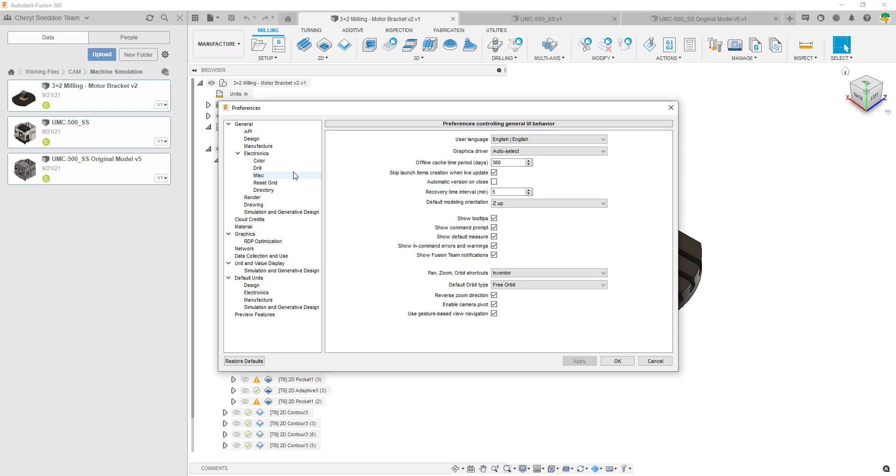If you've been using Fusion in the past, this might be familiar. Up at the top right corner of the application, under preferences, there's an area dedicated to previews. In preview features, at the bottom left, we can use our drop down list to navigate the filter, and if we choose manufacture, we go down the list and look for machine simulation and machine builder. These two tick boxes give you access to an environment where you can build your machine, with your material, your fixtures, your already CAM setups.

These machines you'll be applying are based around milling, and if we put this on as a preview, you'll have access to build your milling machines within Fusion and add some kinematic movements using the machine configuration as well. So we're going to take a look at that today.

Just a heads up, it might be a good idea to also tick the box next to automatically get latest posts and machines. The reason is Autodesk are constantly updating this environment, so we want you to make sure you're working with the latest. The latest and greatest will be automatically downloaded if you tick that box.

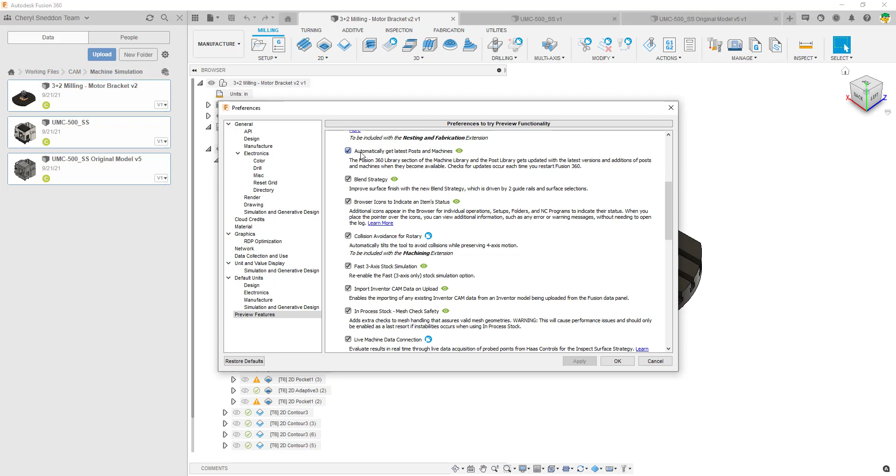Let's take a look at this 3+2 milling example that I have gathered from Autodesk. This is already set up. On the left hand side you can see we've already got some operations, and if we want to bring a machine into this environment, we need to do that through the setup, the original setup.

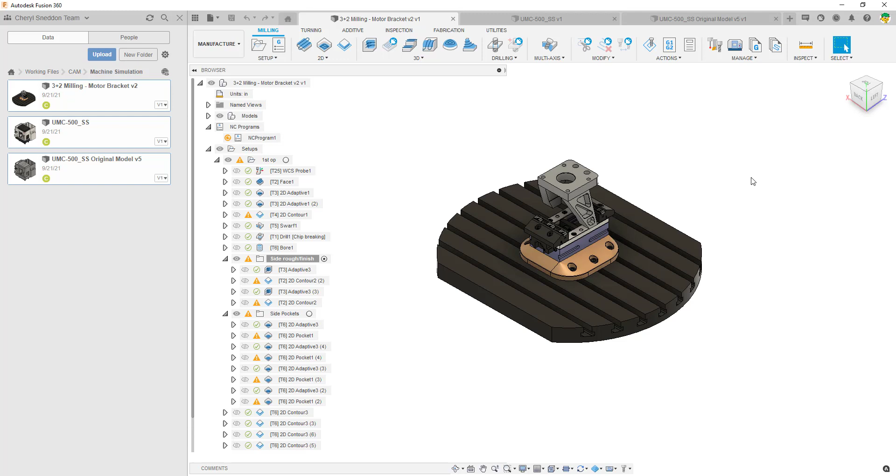When we edit the setup, you can see this has been around in the application for a while, but now we're extending the capability because Autodesk have added more capability with the machine builder, as well as enhanced machine configurations.

So in order for us to see our machine within the environment that we're so used to, with our fixtures and our part and our setup of the WCS and things like that in the beginning, we now have this familiar kind of setup for the machine as well.

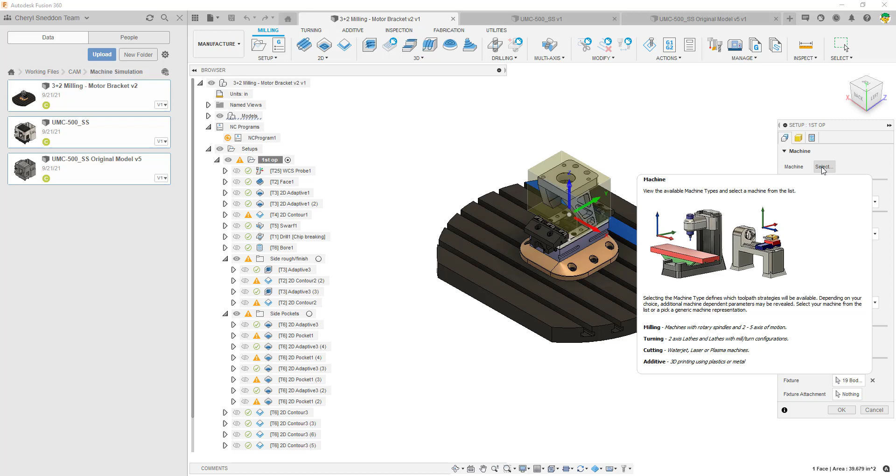If we select a machine, then that machine will basically be part of our simulation within our workflow. This is an added benefit to the fact that we're using a rapid prototyping environment. We want to keep using our prototyping environment to make sure we're not getting certain clashes with the machine, to make sure we're not going out of any limits. Everything looks and feels like it would in reality.

In the first instance, you may not have anything within your document. As you can see here, the document's empty. We don't have any cloud local machines, but we do have this vast library that Autodesk give us access to.

On the right hand side, we can see we've got some filters. Those filters are based around capabilities, and those capabilities are based around your machining techniques. Autodesk have also introduced this as simulation ready, to give you that only list filter, that just gives you the machines ready for simulation.

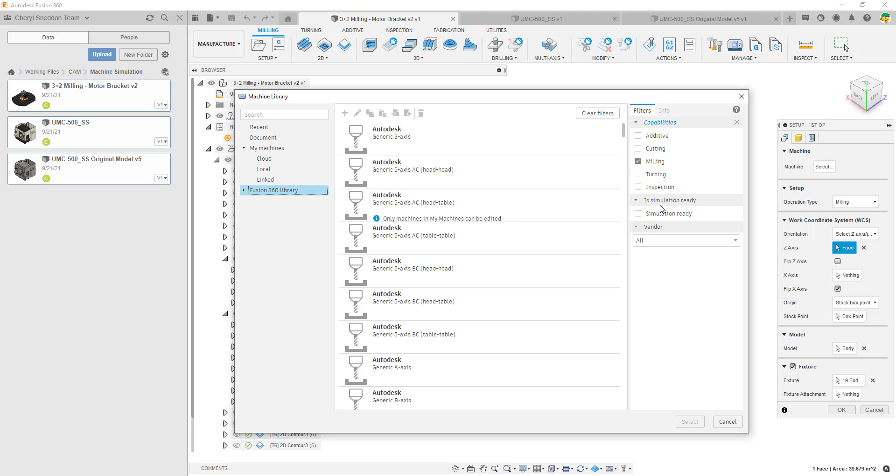The good thing is Autodesk have been focusing on this for such a long time now that we already have machines in there built around very specific vendors, and this is increasing constantly. We're getting more relationships with more vendors, and we're seeing more machines within this list.

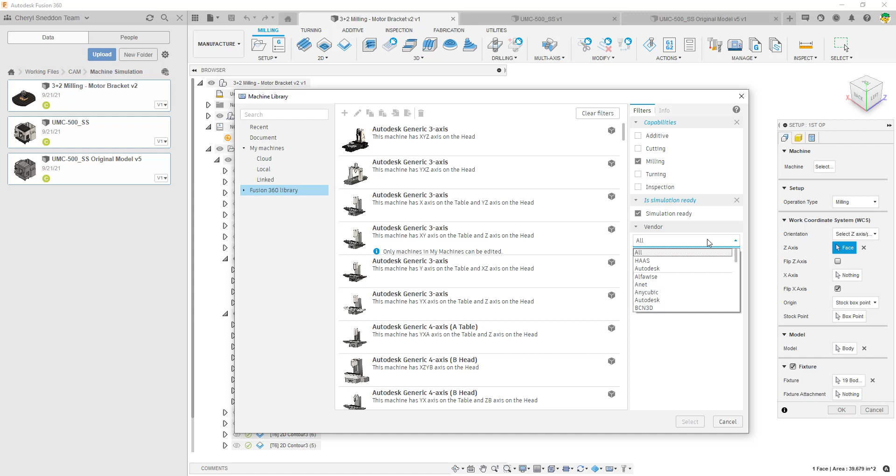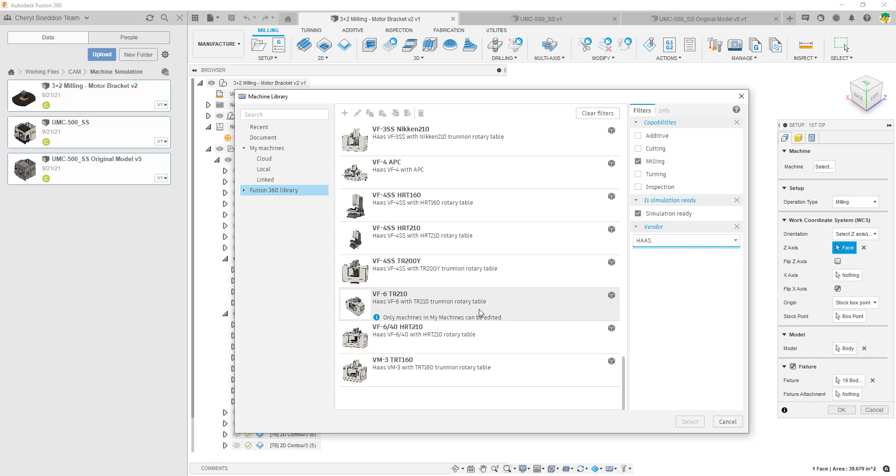So if we go for milling, for instance, simulation ready, and we pick HAAS, we can see the box in the top right corner indicates there's a model attached to that machine. The image gives us a very clear indication that there's already a model ready in simulation, available for us to bring it into our setup.

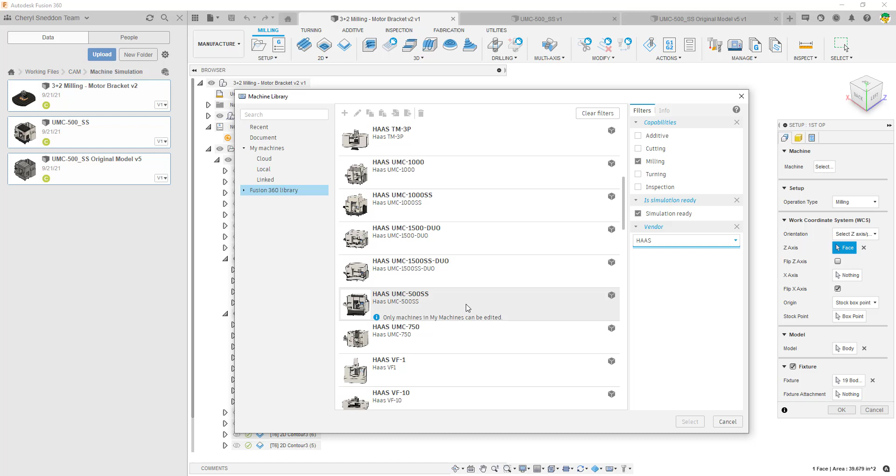So if we go ahead and look for the machine that we're actually going to replicate, today we're going to replicate this type of machine, the Haas UMC 500 SS. It's already in the system, but I want to show you how it can be configured from scratch. I'm going to select this one just now to give you an environment that looks very similar.

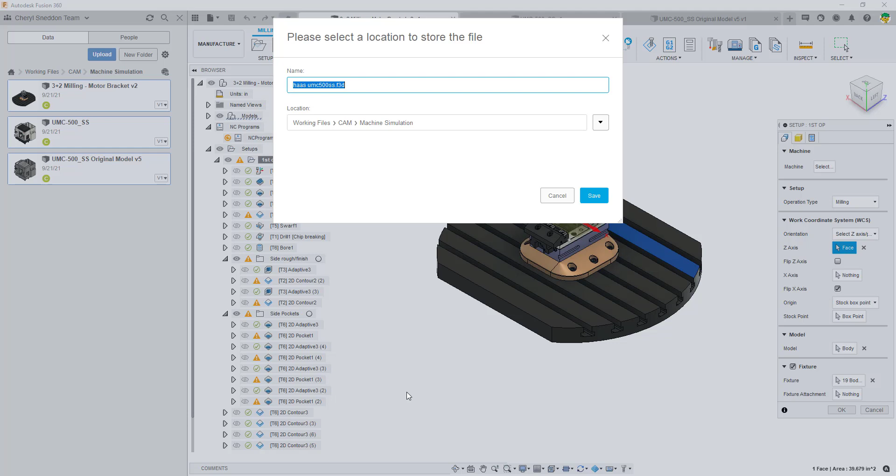I'm going to download the model and bring it into our already set up structure with our fixtures and our part. The first thing it's going to do is ask us to save this simulation model, because the machine is a 3D model, the same as your fixture and your part. So we're going to save it into your folder. You can have a folder that's very specific for those machines you're going to be using, and then it will go through a process of setting it up.

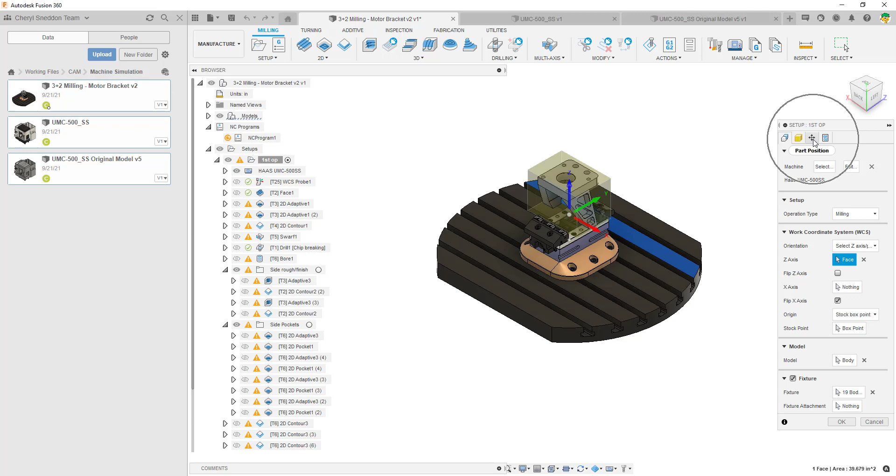Once it's in place, the first thing you'll notice is you get an extra tab now in this setup, and if we go and select that, we get some positional kind of placements and selection types that we can use to place the machine in a very specific way.

If I just show you what the machine looks like, ours is already kind of set up for a certain configuration, and the reason for that is because I've tried to make it quite simple for the video, guys.

So you can go ahead, you've got things like the part attachments, the fixture points, the table attachment, or you've got X, Y, and Z directions where you can move your part around, you can move it up and down, and this is all connected to the table.

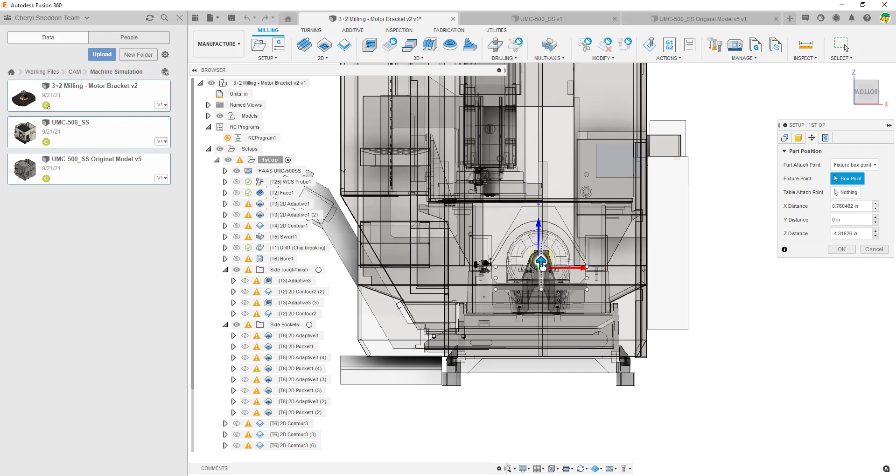The reason why we're working in this way is because the Z is pointing up and down, and that is very, very crucial whenever we're working with these milling machines and setting up the simulation.

So I'm just going to take these values back to 0, and then I'm just going to click OK just to see the simulation in the environment. We can see the machine now, it's been placed in. It's actually looking quite good.

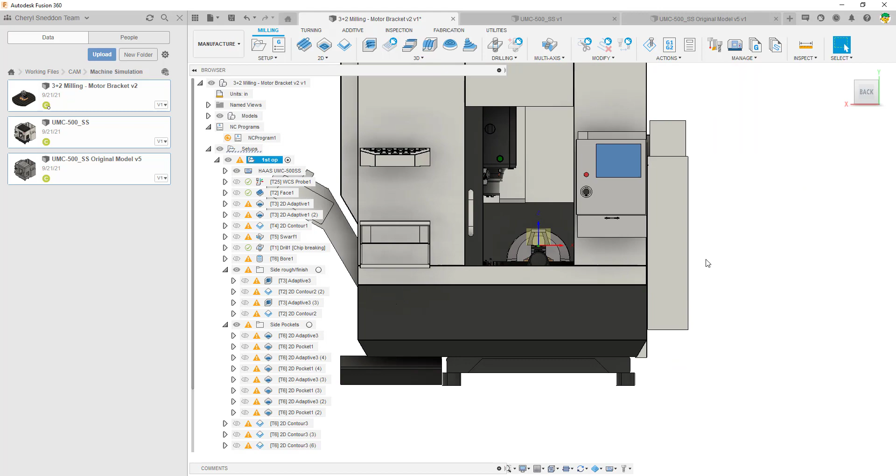So let's just simulate some of these operations we've got on the left hand side. I'll just put this probe one off just now, I'm going to press that out. And then we'll go through a process of just simulating, possibly let's just simulate this side rough and finish, just for an example.

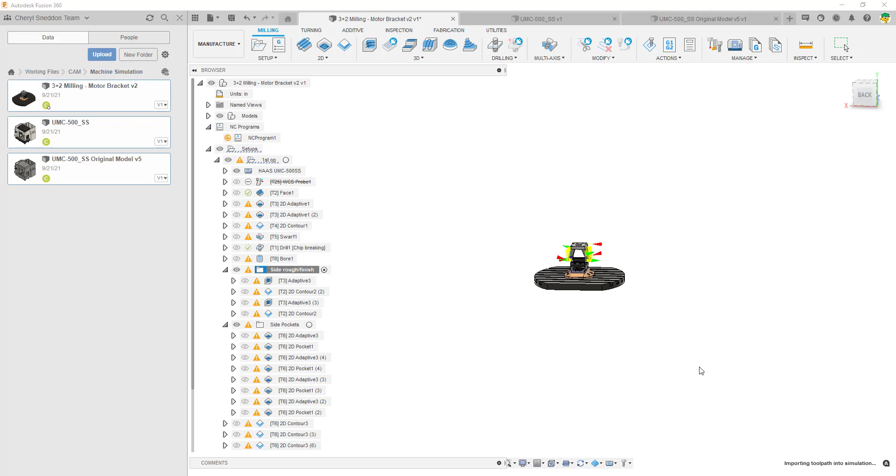And when it pulls in the simulation, the machine will be visible as well. So it's just importing a toolpath into the simulation as well, going through a process of bringing the machine into the environment.

So now, if we just slow it down so we don't miss anything, and then we can speed it up when it starts to move, we can see the simulation of the side of our rough and finish passes. And again, we still have this dialog box where we can choose what we want to see, whether it's the toolpath, the machine, the stock, the opacity, which we can increase and decrease.

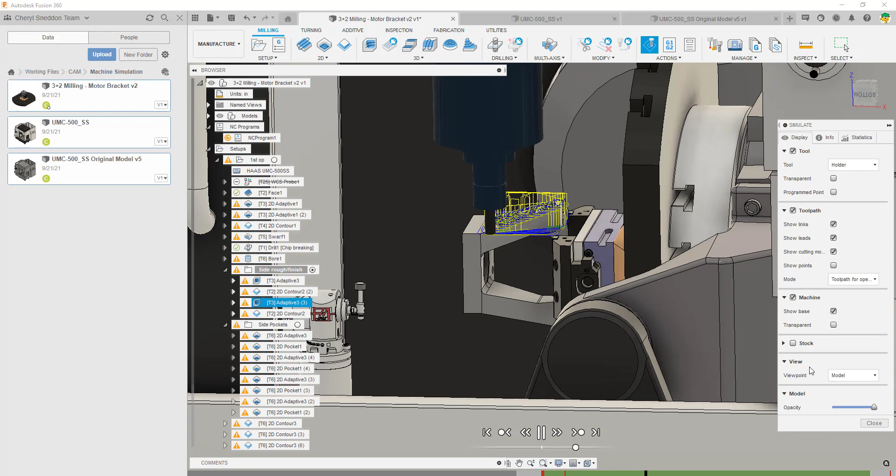We can turn off the toolpaths if we don't want to see those. We can see the machine, which is the most important part of today, so we're not going to turn it off, but we can see the stock. You can see the table moving, you can see the movement of the table, and that's why it's important to have these machine simulations within our configurations as well.

I can only see this increasing, guys, and getting stronger, but as you can see, it's a far better environment. It's a far better way to test whether your machine's going to work in a real life scenario, with your part on the table, with the machine around it, with the limits set up and things like that.

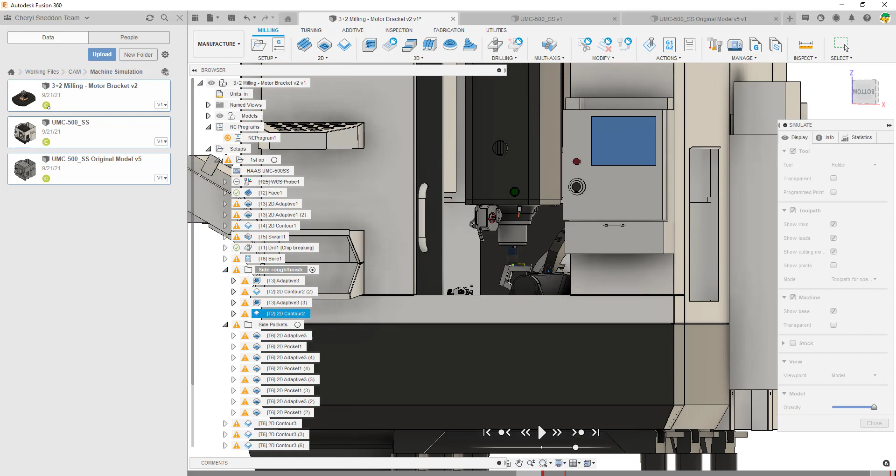And this is just an out of the box configuration. So we can show you, or I'm going to show you today, how to build your own from scratch.

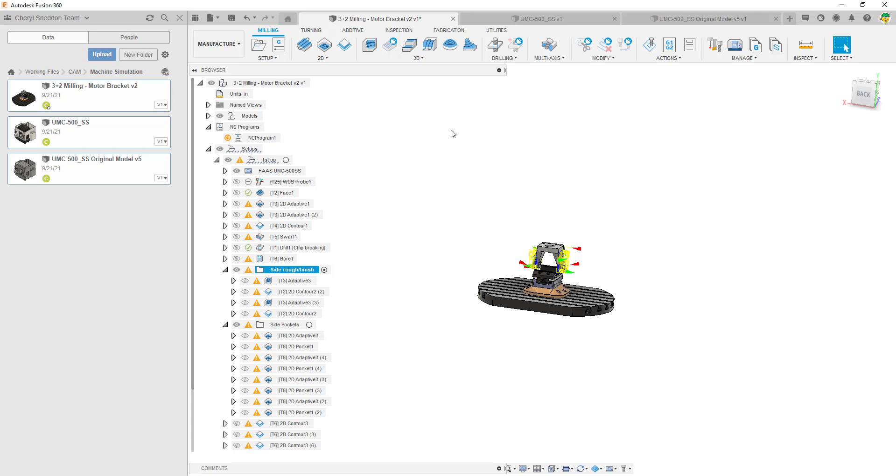So let's close this and get rid of this model, and we'll jump into another model to give you an idea of how it all comes together. Since we're building the machine from scratch, we need the machine model—you could contact the vendor to get access to it. But we've already got a machine specific to the UMC 500. This was the original model, built up of different solid bodies that can be manipulated to help with the machine builder. But before going further, we're going to look at how to start the machine configuration itself without the model.

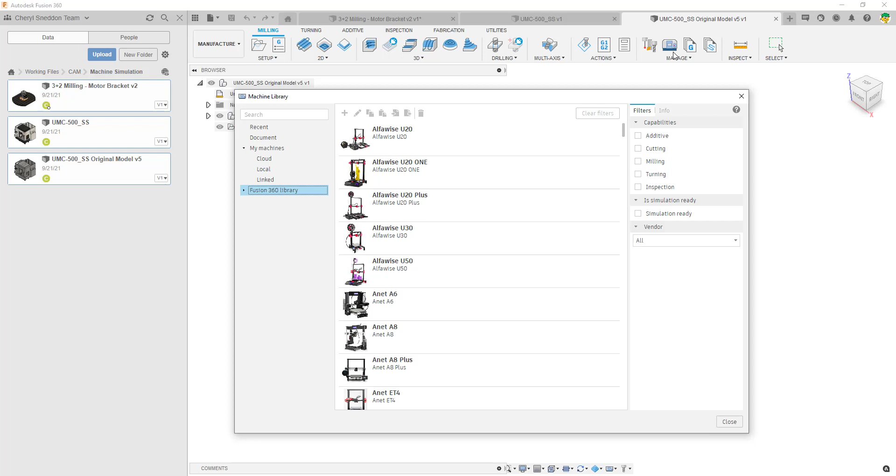So how do we build a machine configuration? If we navigate into the manufacturing environment, we go up to the machine library. Within the machine library, we have a vast amount of machines we can use as a reference to build new machines. Autodesk is trying to get to a stage where the library is the default place you go to—it's filled with the information you need, but we can create our own machines from scratch. We'll look in the local environment, and you can see I've used that machine because I took a copy of it.

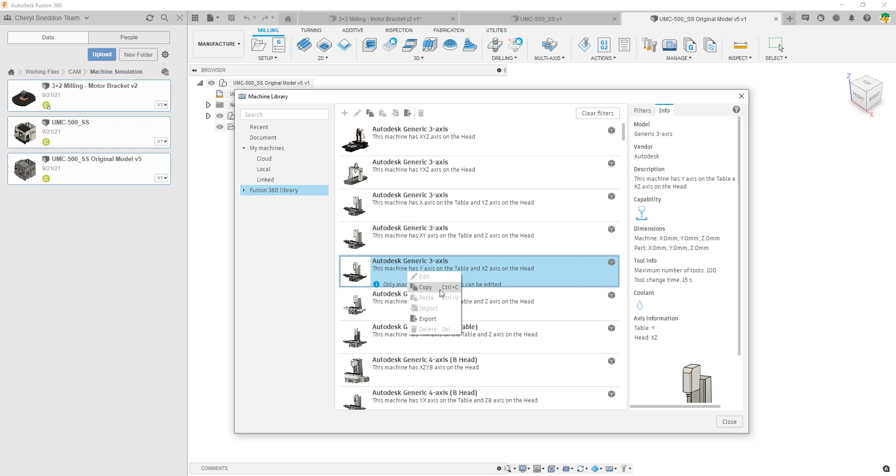So if you're inside this environment and you find a machine specifically around what you're looking for, you can select it, right click on it, make a copy, and take it to the local environment and paste it there. Once it does that, it saves the machine into your environment like it did before, and that will be available in your local environment to make edits to that machine as you move forward.

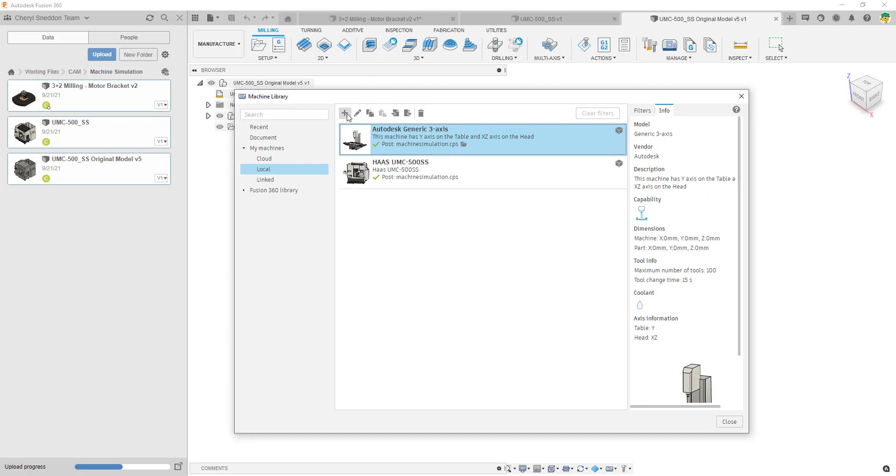But what happens if you want to create a new one from scratch? You'll notice you've got a plus sign at the top here in the dialog box, and that's where we're heading to add information about our new machine. First I'll click on the plus sign. When we click it, it gives us the option of what we want to choose—in this instance, it's going to be Milling. Then we get the machine configuration dialog box up. We configure the machine to a certain level, then build the model at the back end, and meet everything together to become one machine with your part in your new environment.

So what we're going to do here is add some basic information—we're going to duplicate the UMC 500 SS machine from the previous simulation we did. We'll put some basic information in, like a description about the machine: it's the Haas UMC 500, SS level model. We'll go down to the model and fill in the information—it's 500, and we're going super speed. The vendor is obviously not Autodesk in this instance, it's Haas. And the controller on that is going to be the NGC.

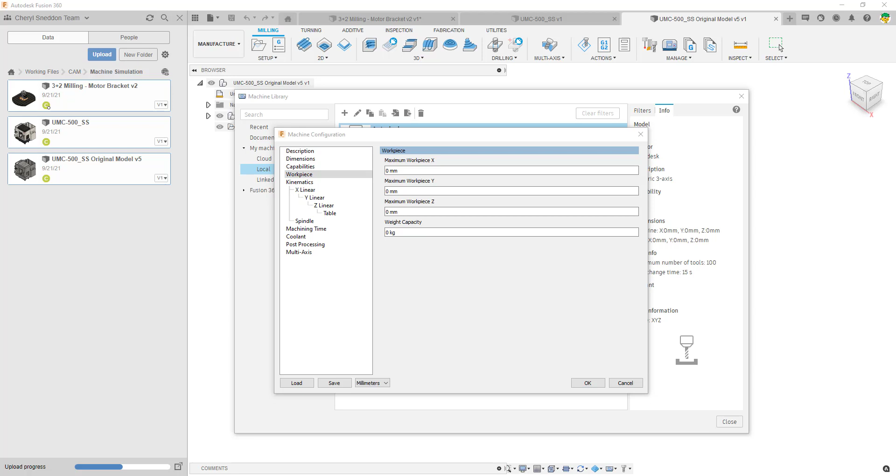Next, we can add kinematics. The kinematics of the machine are pretty important, because this is how you tell the machine how it will move, using the kinematics of your X, Y, Z, A, B, and C. This is where you'd go and find the specification of your machine, gather information about how those move and the limits between them, and import them into this area. This can be modified throughout the process, guys, it's not set in stone. Sometimes you'll put a value in and realize maybe that's not correct, or you see a mistake, and you can reiterate this at any point.

First thing we're going to do is, we can see just now that the X, Y, and Z are currently underneath the table. So we're going to move the X, Y, and Z to the spindle, and then create two rotaries under the table instead. The easiest thing to do here is just drag and drop, making sure we've got X, Y, and then Z. Then we've got the table sitting on its own, so we've got our X, Y, Z spindle, and then our table.

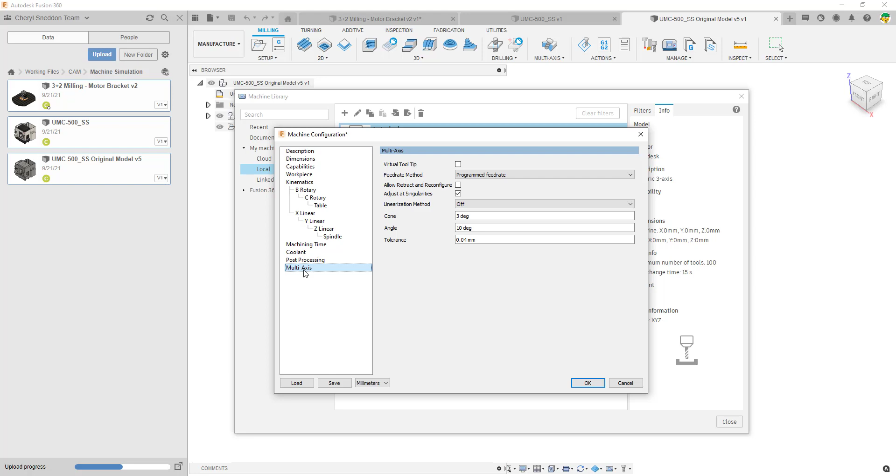I'm going to leave that to last. There is also information about multi-axes. Please be aware that you do have the option to turn TCP on and off for your rotary axis. And again, that information is critical to the type of machine, and it will be dependent on the output.

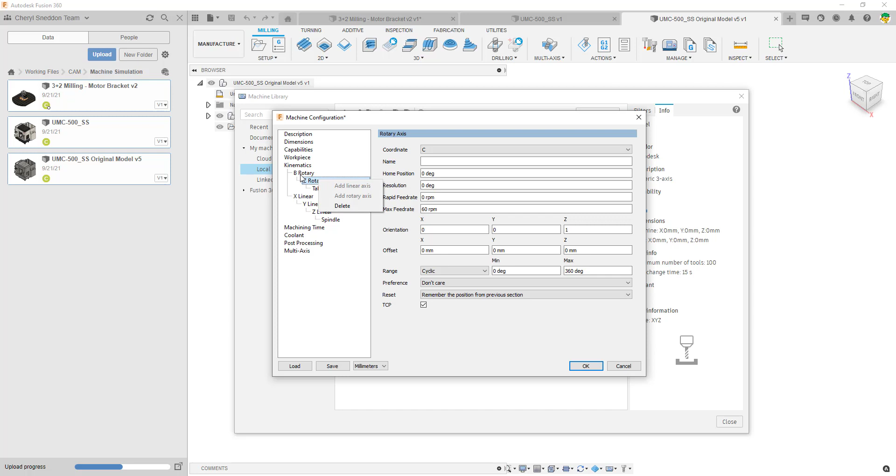So I've done some kinematic changes to give you an idea of how it all works. Very simple, guys - drag and drop, right click menu there if you need to delete or add. So we're going to say OK to that. We've got the basis of our machine. The difference between what we've copy and pasted is there's no post selected just now, and there's no machine.

My machine builder is not ready just now, so that's the first stage. I found my plus sign. I've got my machine configuration to a certain level, got my information from my spec sheet, and then I can go ahead and take a look at the model.

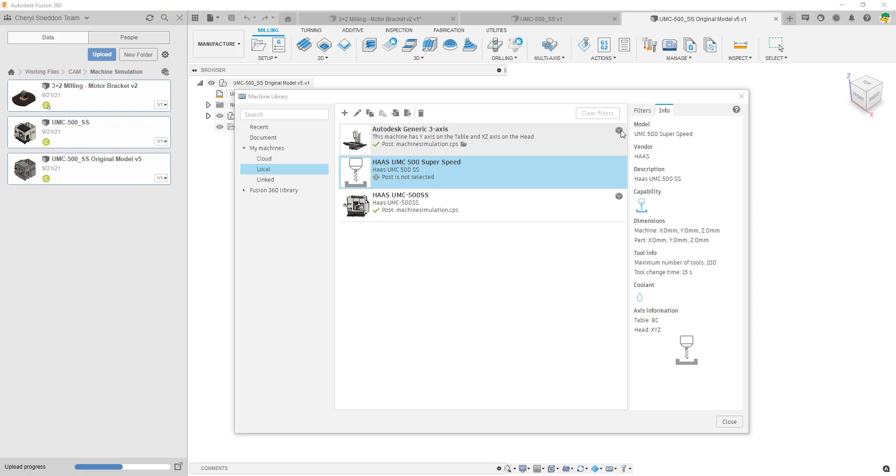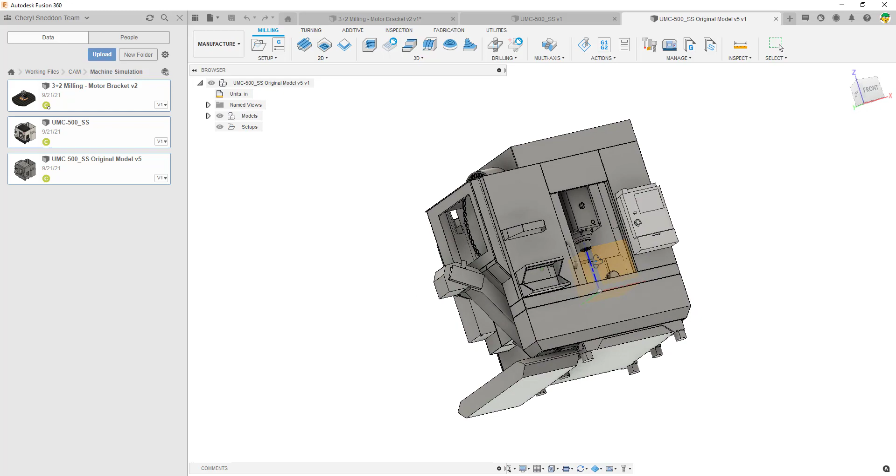So this is the model that's basically built up. This could be a step file imported in from your vendor, or it could be a model you've built from scratch, and all you want to see is basically just the movement - maybe not the actual enclosure. Maybe you just want to see the movement of the heads or the table or something like that, and you don't have all of the elements of the model, but just the things that you know will move.

And the crucial things about your machine assembly. So if we look at this model, it's built up of a lot of bodies, and those bodies, if we turn them on and off, basically represent the information that we will need to control the X, Y, Z, A, B, and C.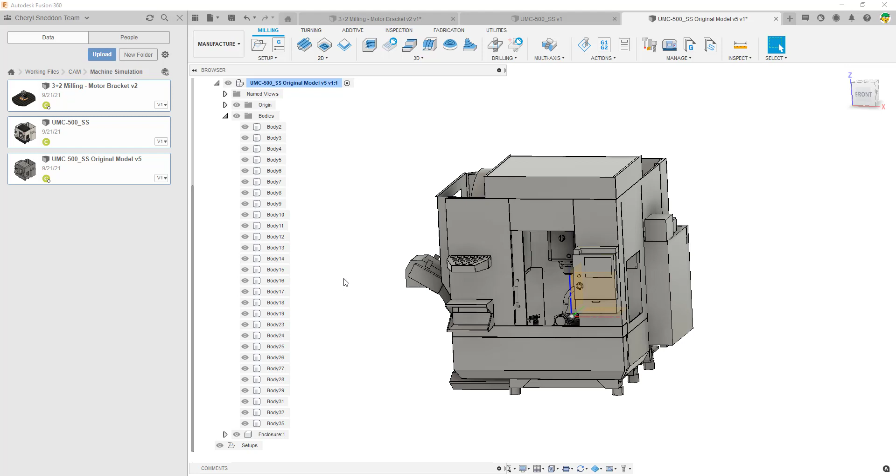So in order for us to work with the model, it's easier if we go through criteria which Autodesk have already set up for us, to make sure that we abide by certain rules when we're working. And if you've used any other CAD application before, simplicity in these types of things is always key.

So in the blog, guys, look for a link. This link will basically represent the best practices that Autodesk have introduced for this kind of build - how you build up your 3D model.

And it's things like making sure it's simple. Make sure there's spaces between components to stop collision, and again that's for future features that Autodesk will provide. And then the model orientation - always make sure the Z is up. The colours and appearances - again, Autodesk have given you a guide to those colours, the best colours to use.

And then construction axes and work planes - turn them off, obviously, because they'll appear within your model simulation and things like that. It's best to just clean up the model. So I've stuck a link in the blog, and if you navigate to that link, it will give you an idea of the best practices of how to build your model.

Okay, but things like keeping it simple - if you've ever used a CAD application, you'll already be familiar with those types of things anyway.

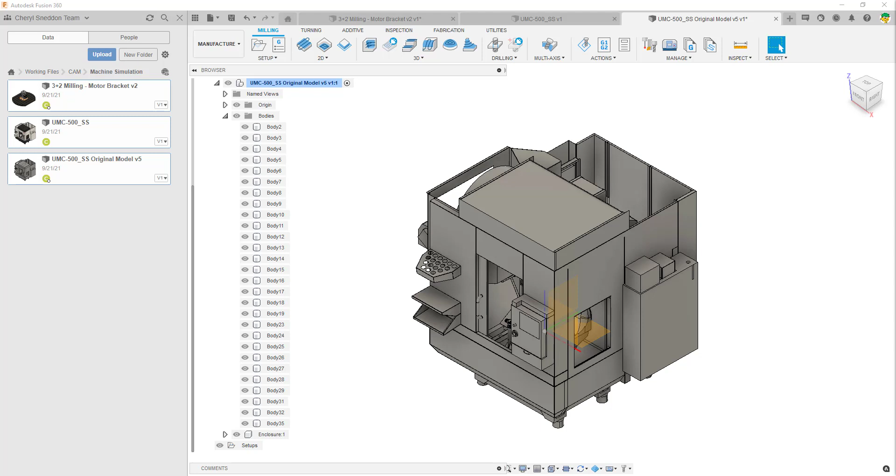So if we go ahead and look at one that I built earlier - if we look at this one here, what I've done is I've navigated down to give you a base and an enclosure. We've got the B axis, the C axis, the X, Z, Y.

And the reason for this is when we get to the next stage, where we need our machine builder, it makes sense to have these in a very specific way, because it will make things very simplistic when each of the component parts are dedicated to each of those axes.

So again, we make the model nice and simple. We add the appearances to help. We get rid of things like construction axes and work planes, and we keep it nice and simple.

So when we've done that and we've got our model to a very simple level, what do we do next? We've already built that machine configuration with our kinematics in the back of the machine library. So how do we link up our model with our machine configuration?

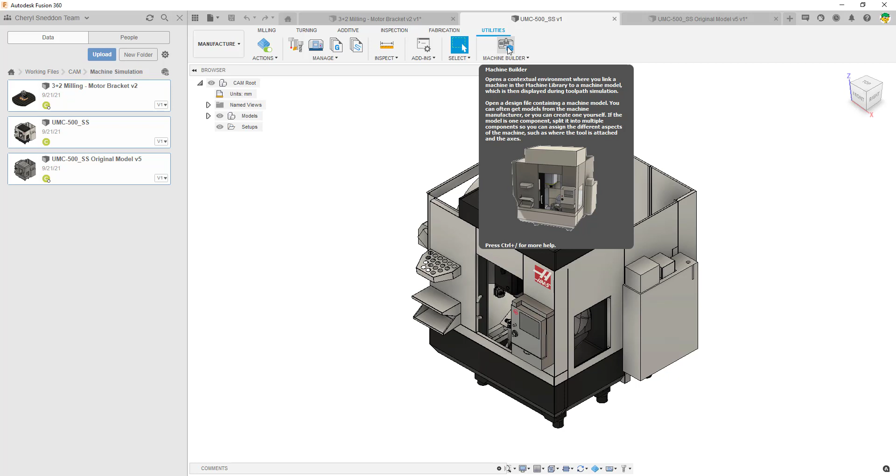To do that, we're going to jump into the manufacture environment, and we're going to go to utilities and look for the machine builder. The machine builder has been turned on in your preferences, and it works alongside your machine configuration. So we're going to click on the machine builder, the ribbon changes, and Autodesk has made this really very simple for you guys. I'm hoping you'll enjoy this environment because I like simplicity, and I hope it stays this simple.

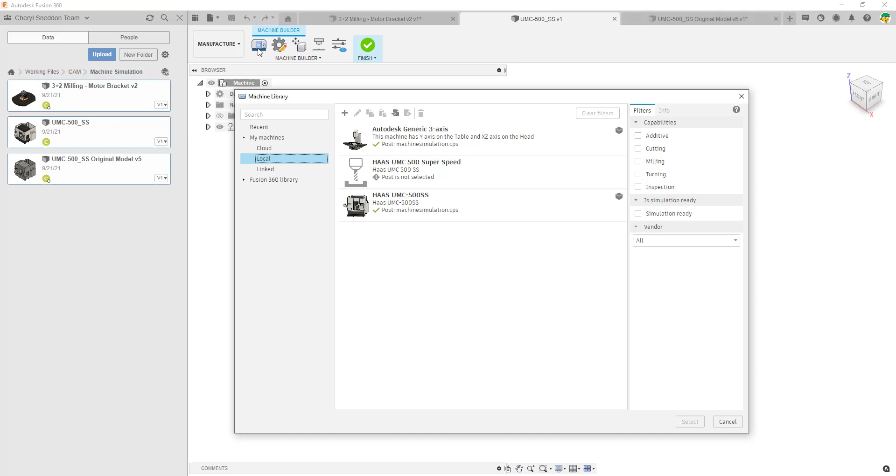If we start from the left and work to the right, if we go select machine, this is going to open up our library, and we're going to be able to go and select that machine configuration that we chose earlier on. So we can select that machine, and then from here we work to the next stage.

We can edit the machine configuration if there's any problems, but at the moment it should be alright. We can also move components, and those components at the moment are all in the place where we want them to be, so there's no need, but we can do that if there was any problems.

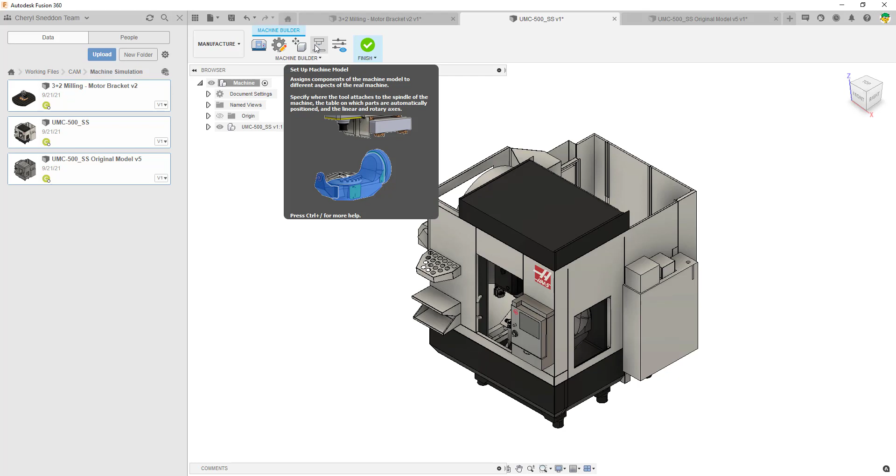And then the next thing we want to do is set up the machine model. When you're setting up the machine model, there are a few things you need to select. Just bear with me. But after you've done this a few times, it really is quite simple, because all you're doing is specifying a model and then specifying a piece of geometry that will allow it to rotate around that axis or move in that linear movement. So if we select the setup for the machine model, the first thing it asks you to do is specify the tool.

If you think about the tool as the head of the machine, we're going to rotate the model round, and what we're going to select is the part under here which represents like the head of your machine, if you imagine. So we're going to go for the circle, and it can be the half circle here or the circle. I've chosen both in the past and it still works perfectly fine.

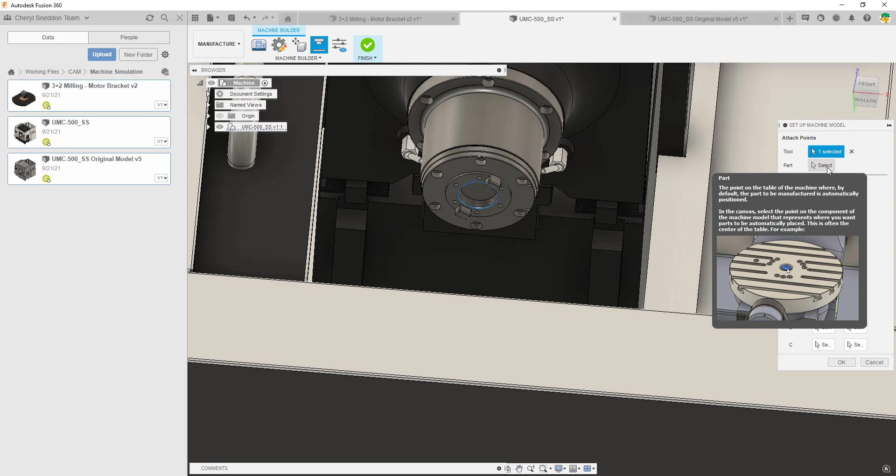And then the next thing we want to do is pick a part, and the part we're going to pick is going to be, as this image on the screen suggests, the middle of the table. So I'm going to move it around, and the selection here is going to be this circle in the centre of our table, if it allows me to select. It's been finicky today. So that's us got our two attach points, the machine head and the table.

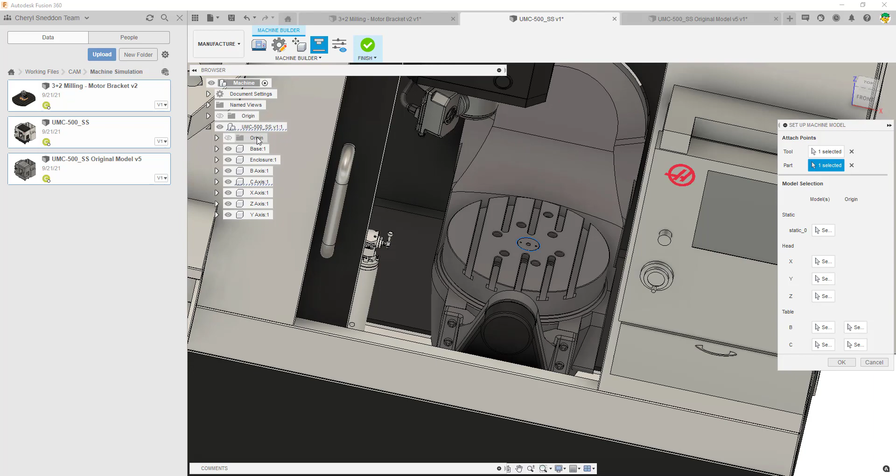And then we're going to go through another type of selection, so things that we want to stay static. This is why it's important to make sure your model is ready. So the things we want to stay static will be the base, and if I zoom out just to give you an idea, and the enclosure of the machine.

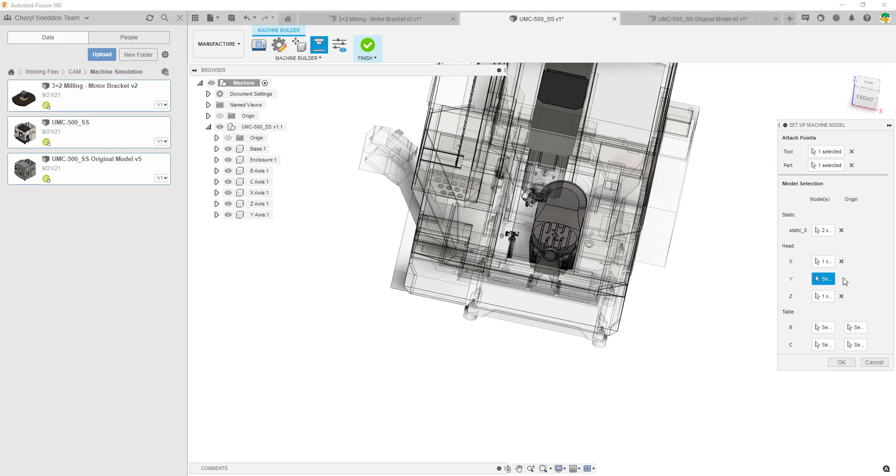And then we're going to go through the X, Y and Z, and again we've made it really simple in the model, and simple's good. So we're keeping it really simple. We're going X, Y and Z selections - X, so we're picking the X. We're going Y and we're picking the Y. We're going Z and we're picking the Z. In fact, let me just pick that Y again, just because I think I might have picked it wrong.

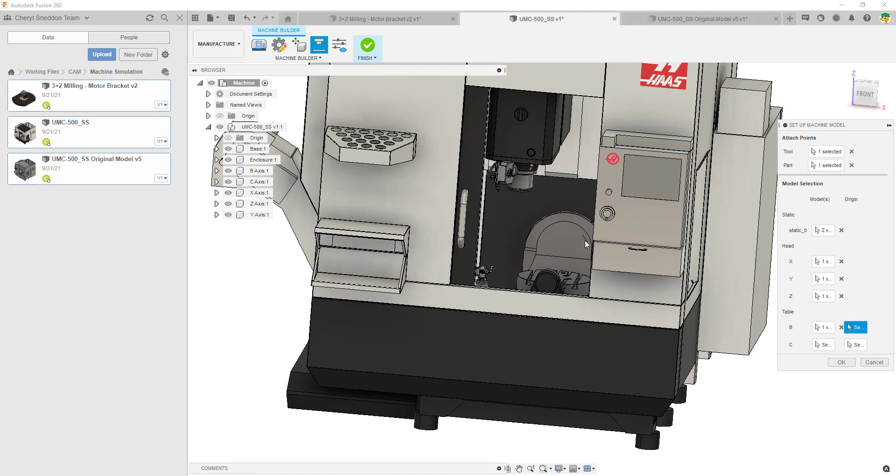That's correct. And then we're going to go B and C. And what you'll notice with the table is you have an extra selection, and I'm going to explain that. So we're going to go the B, and then we're going to pick the B. But when we pick the B, we need to tell it that we want it to rotate around something. So if I zoom in here, you'll find there's a circle that represents the rotation around that table, and it's part of the model. So you can make it part of your model geometry and make it a bit simpler for you to select.

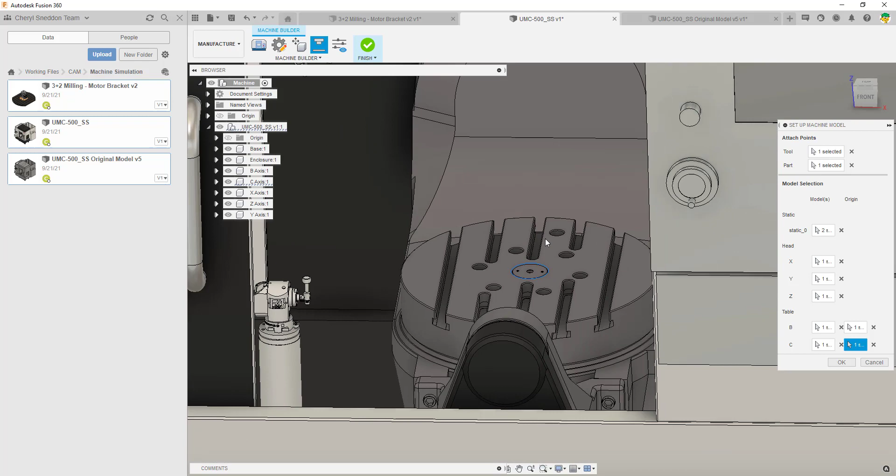So I'm going to go for the C, and I'm going to go again and pick the C, and then again I'm going to go for the centre of the table, which is there, and then I'm going to say OK. And then what's going to happen now is something that you're going to think is just wow, it can't be real, but it's as simple as this, guys.

Now that we have put in the limits of the head, we've put the limits of the table, and we've selected some basic geometry, and we've built our model in such a very specific way, with those step-by-step guides that Autodesk have given us, we're now able to flex our machine within those limits.

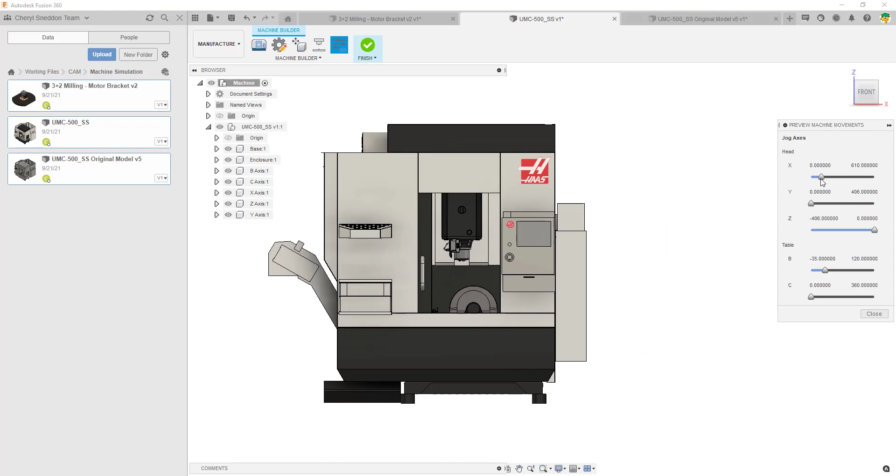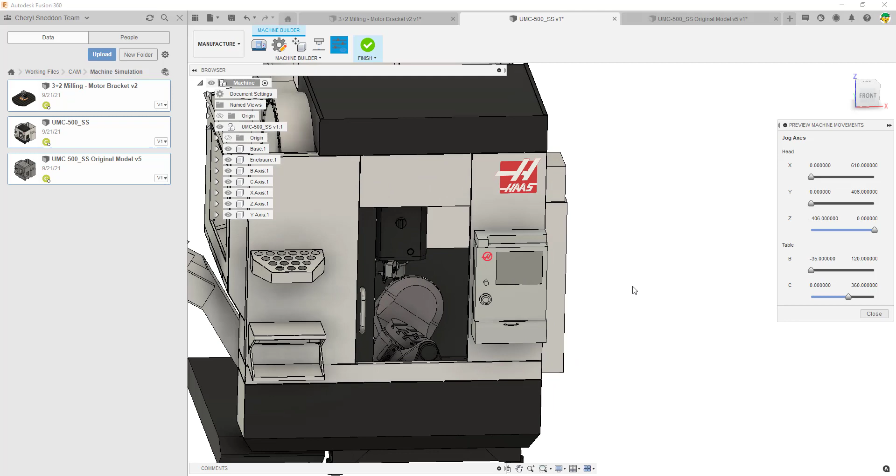And I'm not going to lie to you guys, I was super impressed by this almost from the get-go, and I'm quite sad when it comes to geeking out on new tech. So, I've also got my rotary, and I've got my C direction as well. And I just think that's really fabulous, and it's just been so simple to this stage.

I haven't really done much to prep this model. All I've done is some basic solid manipulation to make sure that the components are within component sub-assembly levels, to make sure that they move whenever I move and flex the model like I'm doing. When I click close, everything will go back to its 0 position, and that is all geared towards the kinematics of the machine.

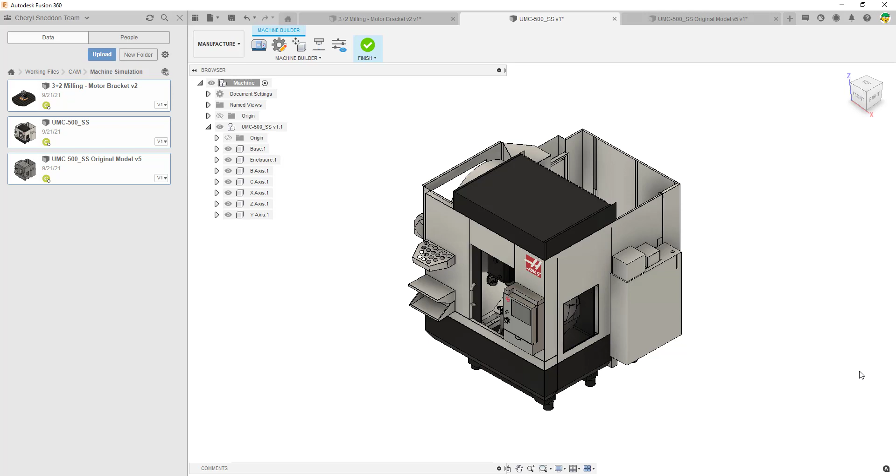So if I go and edit the machine, remember the kinematics of the machine were the limits that you specified that came from the website. So there could be specific home positions, and therefore you would apply those. These could be made like specific names - again, work with the information that's there, try your best to work around it.

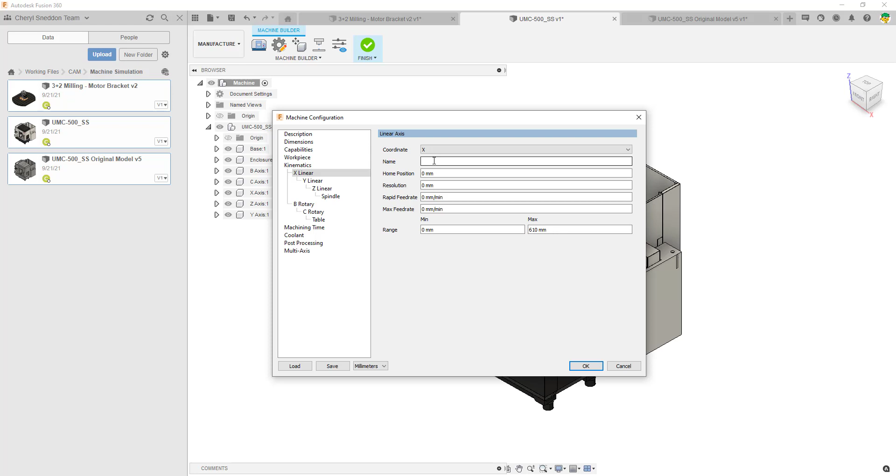And if you've got any questions, you can also follow on us and we'll help. The last thing that I'm going to mention just on that note is the fact that the post processor still hasn't been added to the library either, okay.

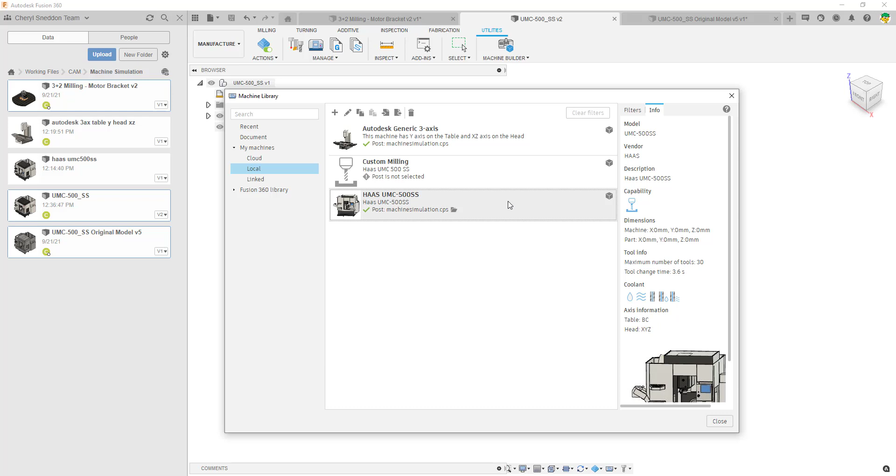So Autodesk provides you with a library of post processors. At the moment, within your machine, you don't have a post processor attached, and the reason for that is because it'll probably be your generic 3-axis post that's been attached. So if you need the 5-axis, there are a few things that need to be done to the generic 3-axis post to allow you to get it up to that 5-axis capability for your new Haas.

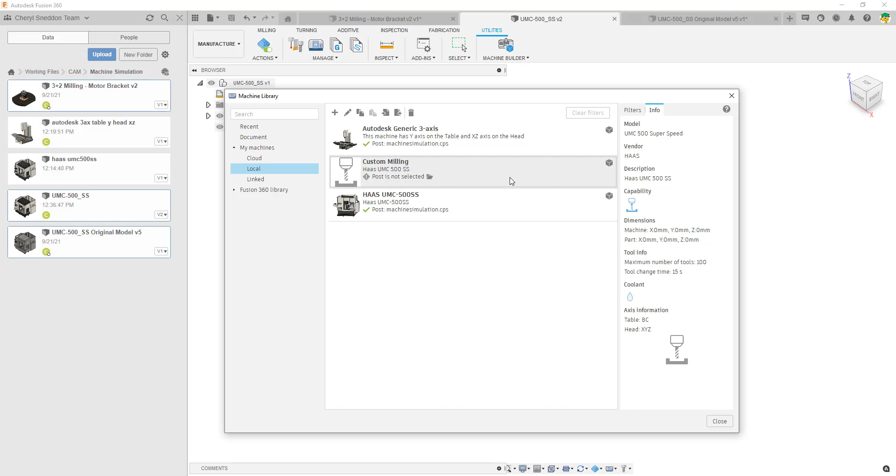So if I edit this just now, just to give you an idea, under the post-processing side, there's no post-processor selected currently. And the ones within the libraries, as I say, are geared towards 3-axis machines.

So in the blog, guys, I've added a link, and within that link, basically you will be able to read up on what you need to change within your configuration. And that configuration within your post is important. It's geared towards the fact that you need to add machine configuration to your post processor to allow you to have the 5-axis movement within your machine and not just the generic 3-axis movement.

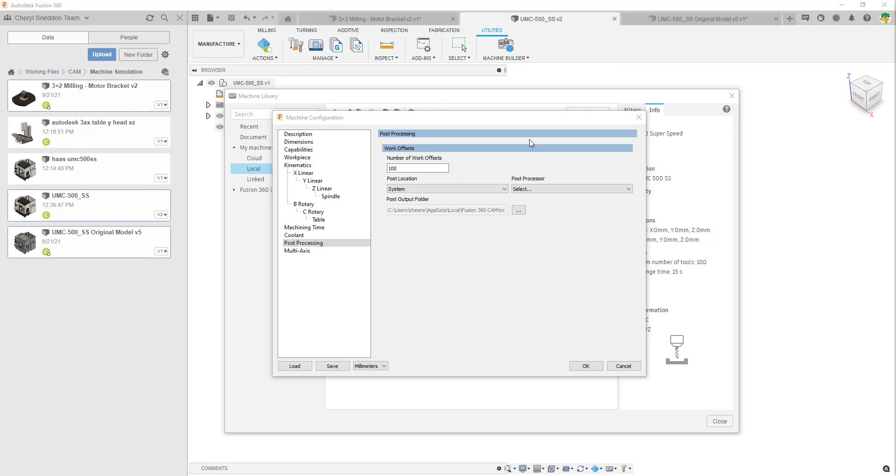Alright, so I hope that's given you an idea of how to use the machine configuration and the machine builder together within Fusion 360.